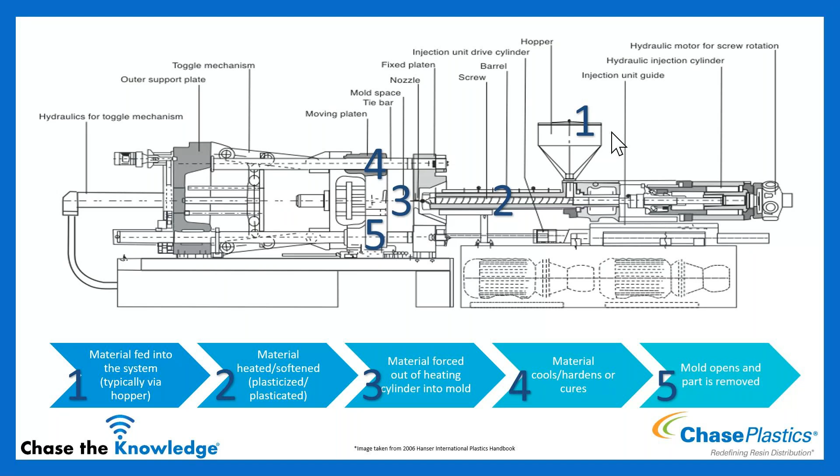So now that we've covered those basic pieces of the injection unit, let's talk a little bit about how we've got to the configuration of the injection molding machine that we're most familiar with today.

When injection molding started out, we were in single stage plunger units. This is a non-screw type machine where you have a barrel that's heated. Material is fed into this. The plunger then forces the material around a spreader, and that spreader is really where the heat comes into play. As that material is spread around the spreader there's heater bands along the exterior, and that allows the material to soften and become molten. And then the plunger continues to feed material across that spreader and into the tool.

These are the oldest configurations of molding machines as we know it. Some of the most early versions of this utilized things like a hand crank wheel to operate the plunger.

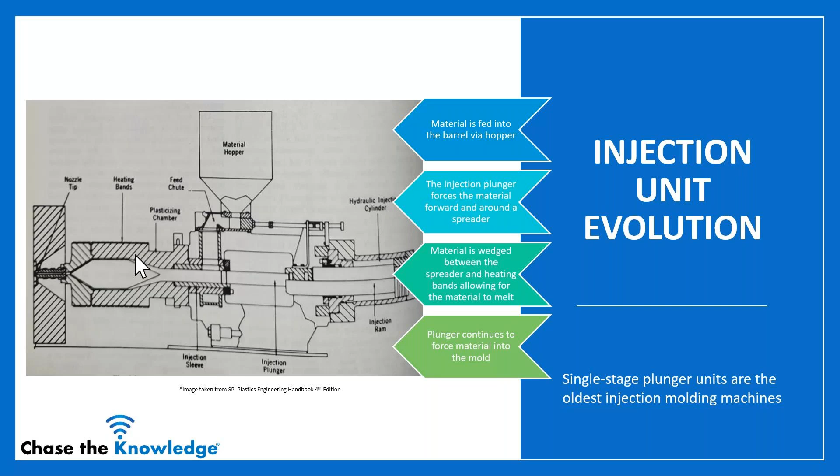From there, we started to separate the plunger and the dosing unit. So now you have two injection units, one responsible for melting and feeding the material into a secondary plunger, which controls the injection and dosing into the tool. So in this scenario, material is fed into the hopper at the top and into the first plunger and around that same spreader that we saw from the prior slide.

However, instead of going directly into the tool from here, the first plunger feeds a second cylinder. This injection cylinder, once it has a sufficient shot fed into it, can then inject forward and dose material into the tool.

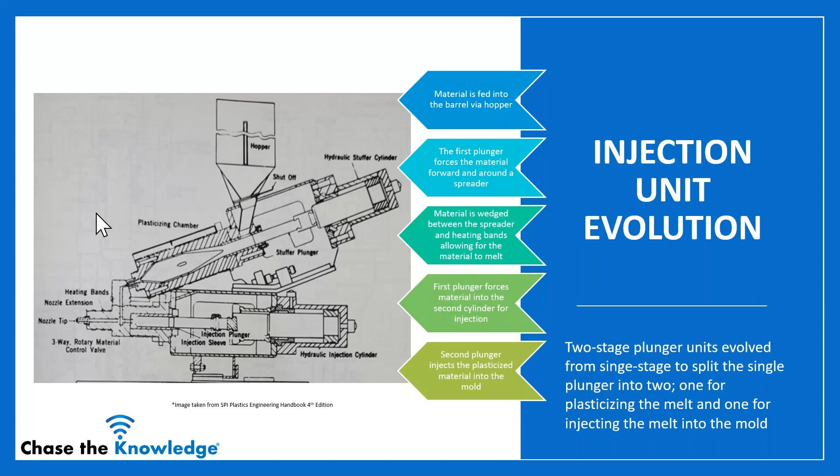Now, you may still find some variations of those machines out there today. Most notably, Sodick produces a screw-in plunger type machine that you can find something a little bit closer to that two-unit style here, although it's going to be a plunger and a screw.

That leads us to the most common setup for an injection molding unit that we have today, and this incorporates the reciprocating screw. So much like the other scenarios, you're going to feed material into a hopper and through the hopper into the barrel. However, now we have a reciprocating screw that as it rotates, material is fed down the length, lets us build a shot in front of the screw.

And then we use the screw also as a plunger by the use of a check ring or non-return assembly at the end. That allows us to not only plasticate with the single screw, but also to use that screw as an injection cylinder.

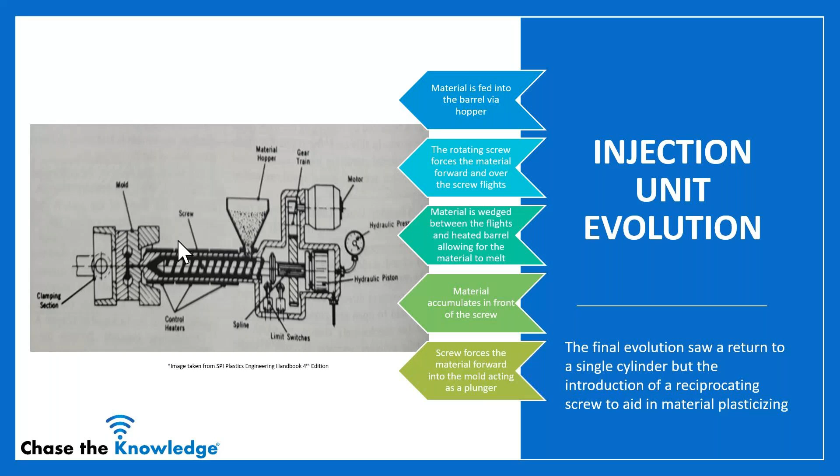What we call there is a pre-plasticizing style. The two-stage and the reciprocating screw pre-plasticize. In the single stage, you're plasticizing at the same time that you're forcing continuous material over it.

The reason we've switched to this style is there are several advantages. Melt homogeneity is a large one here—you get significantly better mixing, faster injection speeds because you're not forcing solid material through the spreader. You will have some higher injection pressures, but you get better injection control and better shot weight control with pre-plasticizing units.

As the industry through the 70s became tighter in profit margins because of what was happening with the petrochemicals industry, having better control of shot weight, shot size, and injection to reduce scrap became extremely important for us. So these are some of the ways the industry has adapted to drive us forward through those changes.

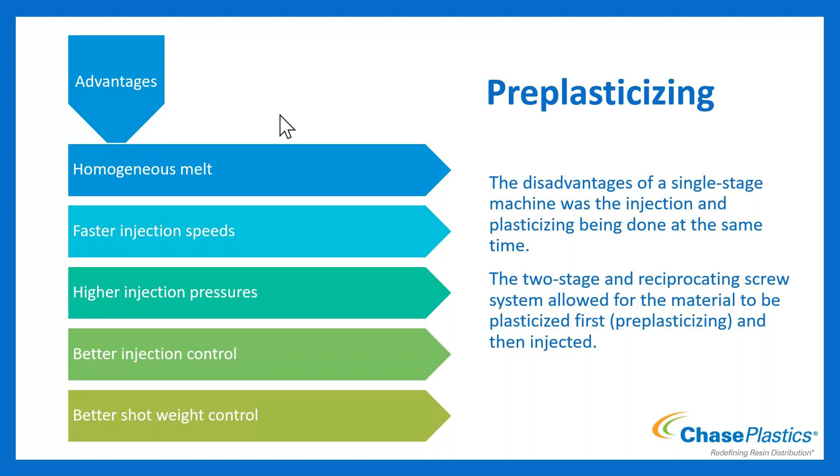Now that we've got a handle on the injection units, let's talk a little bit about the different molding techniques. Again, we're going to look to history to see where we started and then use that to understand where we've come and why we got here.

So firstly, when we were dealing with those initial plunger style machines, we had a lot of what we would call a traditional molding process. There's no splitting of the fill, pack, and hold—everything is done in an injection.

Now, in the 70s, the folks over at RJG realized there were advantages to splitting the injection and the packing and holding phase, so the decoupled terminology comes from that group. You will see here decoupled 1, decoupled 2, and decoupled 3. So really, this is decoupling the injection phase from the packing phase, and then all the way down to separating a fill, a pack, and a hold stage all into their own portions of the cycle.

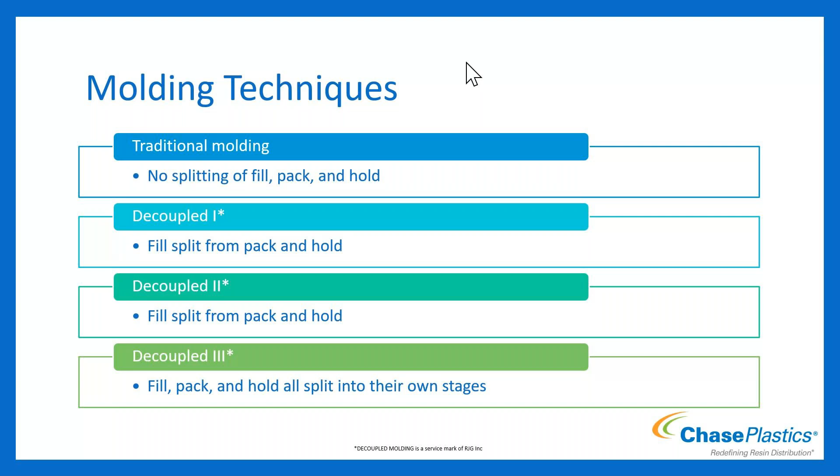So let's unpack these a little bit so we can better understand some of their pros and cons, and better understand why we have taken steps forward from what we would consider the traditional molding style.

So the traditional molding process, again, this is our earliest injection technique, unsophisticated machines, single stage plunger. All we're doing is continuously forcing and squeezing material through that heated spreader and holding it in there until the part's solidified, or forcing it in there until the part's solidified.

If you didn't fill out your cavity, your only recourse is to squeeze more material in harder. However, that also led to quite a bit of what we consider overfilling or overpacking. You may see things like flash or dieseling, and those were really your only two knobs. Push it harder, push it softer.

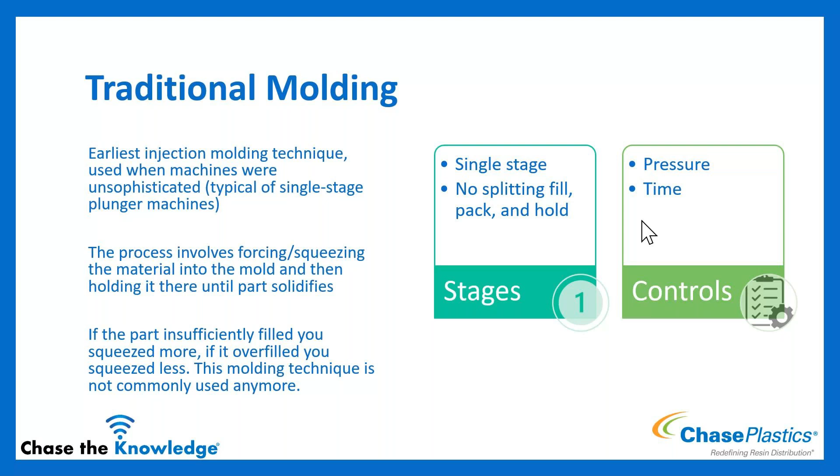It didn't give much control at all, and certainly could not handle a lot of the sophisticated geometry nearly as well as the scenarios and techniques that we use now. So this stage is a single stage, no splitting of the fill, pack, and hold, and pressure and time are your only controls. So then we move into the decoupled 1 scenario.

This is the earliest adaptation of it, and it requires a 2-stage reciprocating screw machine or newer to accomplish. In this process now, we are filling the mold with a controlled velocity until the part is volumetrically full, and then we transfer to the pack and hold.

In this scenario, the melt inertia from fill and the pressure generated is used to pack the mold. It's not a fully separated decoupled two process where the fill and pack are handled completely separately, but it's more the first acknowledgement that the packing of the mold was also a critical portion of the cycle.

So this is a two-stage process, and fill is decoupled from a single pack hold combined step. And now you have velocity, pressure, and time as your control variables.

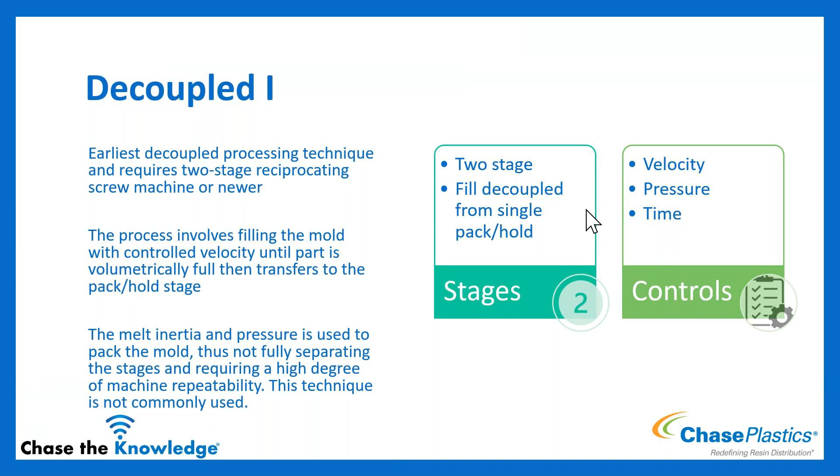From there, we moved into decoupled two. So this is the next evolution. Again, this needs a two-stage reciprocating screw machine or newer. And now we're filling the mold under a high velocity to take advantage of shear thinning in material rheology, polymer rheology.

However, unlike decoupled one, we are now underfilling the cavity on purpose in the fill stage. We're only going to fill it to 95 to 98% full so that we don't have the inertia and the generated pressure of the material reaching full volume of the cavity, but instead we're going to fill it to that 95 to 98%.

And then we're going to initiate a pack under pressure control. So this technique then allows us to fill much more rapidly because we don't have to worry about the inertial overshoot of filling the cavity, because we're purposely going to leave the cavity with a small amount of volume in it so that we can account for that under the pack phase. So that fully lets us take advantage then of polymer rheology in shear thinning to increase repeatability.

And then we can pack separately. So again, this is a two-stage process, and now fill is completely decoupled from pack and hold. And again, velocity, pressure, and time are our control variables here.

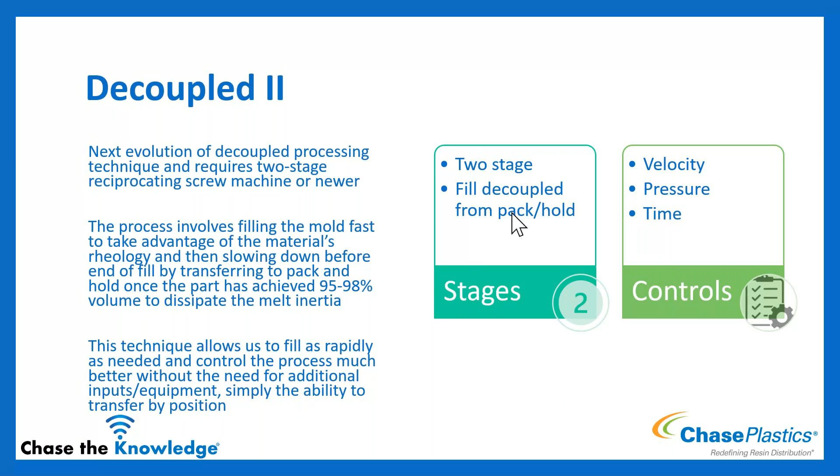From there, we moved into decoupled three, which is what we consider the newest evolution of decoupled molding, and does require some extra equipment and typically newer molding machines to accomplish.

So much like decoupled two, we're going to fill the cavity under high velocity to take advantage of that material rheology and shear thinning. We're then going to pack at a low and controlled velocity to meet a set pressure. Once that pressure is generated, we can drop the velocity component so we're no longer moving the screw, but we're statically holding at a pressure now.

What this does is gives us significant control over the pressure in the cavity of the tool. Now you may ask, when would that be extremely critical?

High volume multi-cavitation tools can benefit greatly from a decoupled three process, but so can insert molds, especially if the inserts are delicate and have a maximum pressure that they can tolerate during the molding process without being damaged. So you may see magnets inserted using a decoupled three process to protect the magnet.

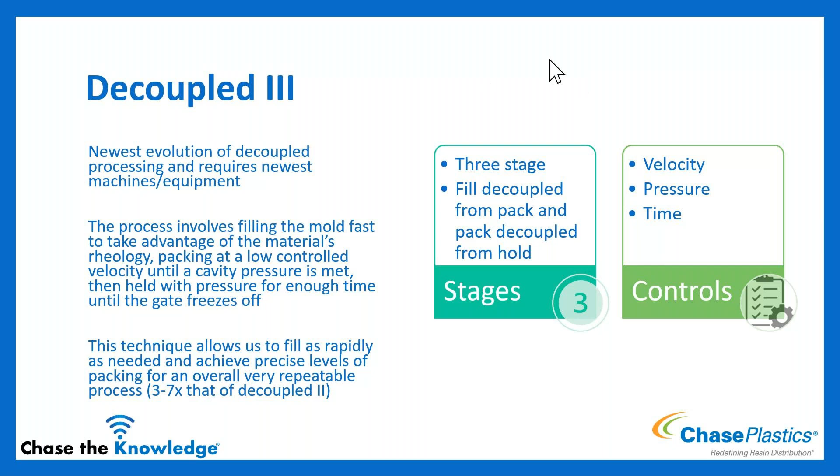Okay, let's talk a little bit about the cycle. Here you have a typical injection molding cycle represented in a pie chart. We're looking at cycle start, mold close, filling the tool, pack, hold, cooling and recovery, mold open, and ejection.

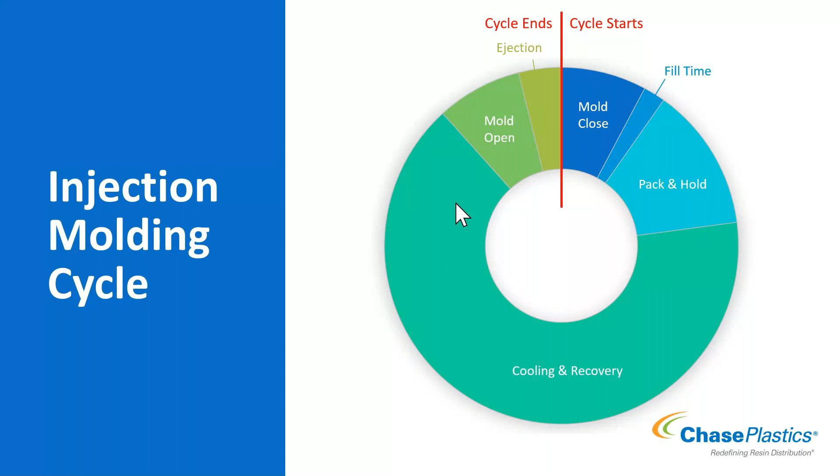During the fill stage, as I mentioned earlier, this should be controlled by velocity, which means we need to give our machine enough pressure to achieve the set velocity. And we need to give it a little bit extra to account for material variation from lot to lot, so that we don't end up in what we call a pressure limited situation, where our velocity becomes limited by the pressure we've allowed the machine to use.

There are a couple of studies that need to be conducted during this time, and we'll talk more about them later, in order to optimize this process in the scientific molding methodology. In this portion of the cycle, we conduct what's called a short shot study and an in-mold rheology study.

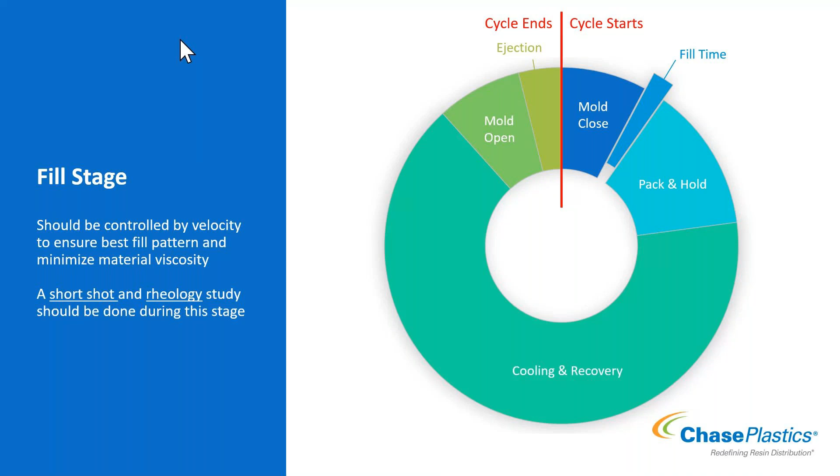So the short shot study, this lets us determine the appropriate volume to inject into the tool to hit that 95 to 98%, so that we can transfer to pack.

In order to do this, we're going to make sure that pack and hold is zeroed out or turned off. No pack and hold pressure, no pack and hold time. We're going to adjust our transfer position upwards so that we do in fact achieve a short shot.

We're going to mold that short shot, weigh it, and label it part only. Then we're going to decrease the transfer position and reiterate that same process: shoot, label, weigh, at varying percentages of fill. I like to do this at 10, 20, 30, 40, 50, 60, 70, 80, 90, 95 or 98, and 100%, so that you have a significant fill progression.

This lets you visualize how the tool is filling. It lets you validate your filling simulation. Am I seeing the same fill pattern in my tool as I am in my simulation? That gives me good confidence that some of the other outputs from my simulation are likely correct, or at least directionally correct.

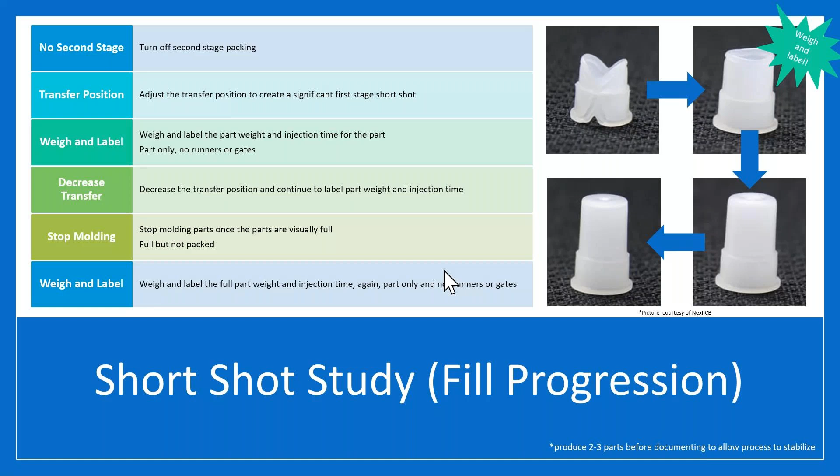So once we've made those 10 or 11 pieces, we can then get an idea of where our 95 to 98% fill is so that we can adjust our shot size accordingly. Not only are we going to learn how the tool fills and where gas might get entrapped and where we might need to vent, we're also going to validate our simulation and determine our first stage fill volume, all with this study.

From there, we're going to perform a rheology curve, also called in-mold rheology or an in-mold viscosity curve. What we're essentially doing is getting a relative viscosity and relative shear rate so that we can capture the shear thinning of the material in our specific machine and tool.

So how do we conduct this? We're going to turn off that second stage again. We're going to ensure that at our highest velocity, we still have a short shot so that we don't accidentally inertially overfill the cavity and flash it. So you're going to start with a high velocity and a higher transfer position so that you're not accidentally flashing the tool. We might want to bring that transfer down a little bit from our 95, 98, maybe 85, 90%, somewhere in that ballpark, and then adjust our velocity down.

We're going to make sure that we're documenting the speed, the time, and the transfer pressure at each iteration. We're going to conduct a series of 2 to 3 injections at each velocity set point and document the speed, time, and pressure. From there, we can calculate an apparent shear rate, which is going to be 1 over the fill time. And then we can calculate an apparent viscosity, which is going to be the injection pressure times the fill time.

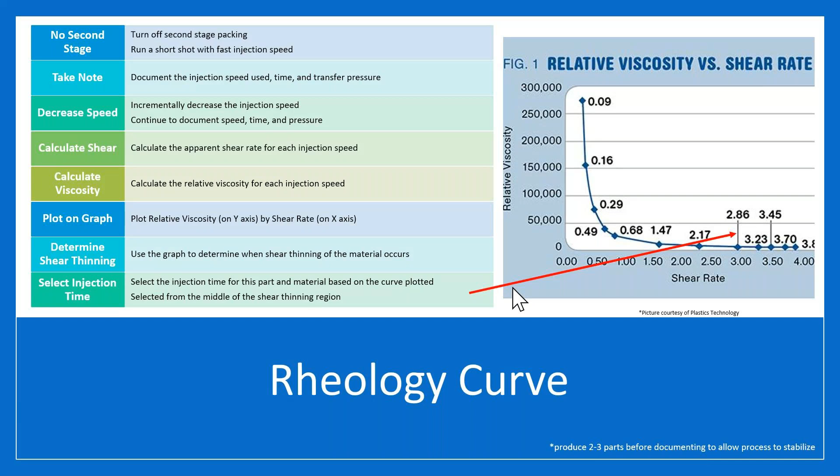So I've been mentioning taking advantage of the shear thinning behavior. So what is this? When plastics are exposed to shear, we get an untangling. At solid, you have just an entangled mass of polymer chains. As we heat them, those chains start to increase their intermolecular spacing - think of the chains getting a little further apart. Once they're hot enough to be far enough apart that we can slip them past one another, we have flow. As we flow them at higher rates, we get orientation and alignment. That orientation and alignment is what drives our viscosity down. That's what makes a polymer a shear thinning material.

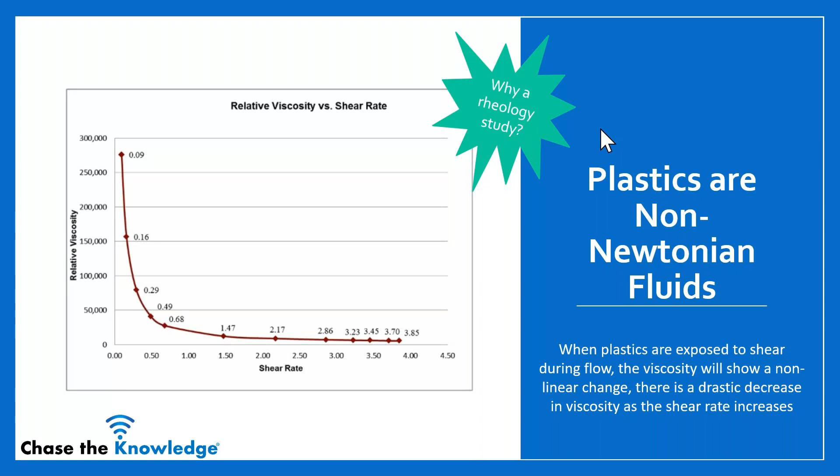So what we're really interested in is the polymer's response across the shear regime we're going to be working it in. For today's conversation and this webinar, we're going to be talking about this middling shear regime where we do our molding. We can see that the response of these polymers is not linear in this shear regime, and that's why we do the in-mold rheology study. This is really what we're trying to understand when we're doing that shear sweep and trying to figure out where we should best process these materials.

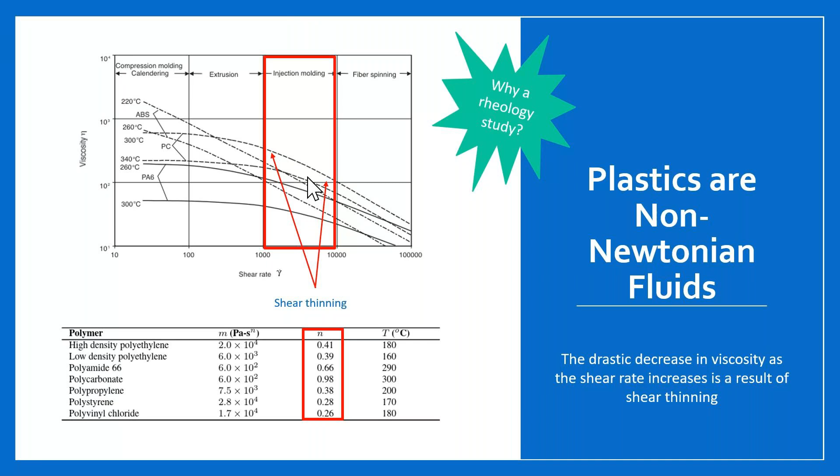Okay, so once we've filled the tool to our 95 to 98 percent, we transfer from velocity control to pressure control. Many people call this transfer; others know this as the VP switchover position. That VP literally means velocity to pressure switch position. So we're switching our control methodology between fill and pack and hold.

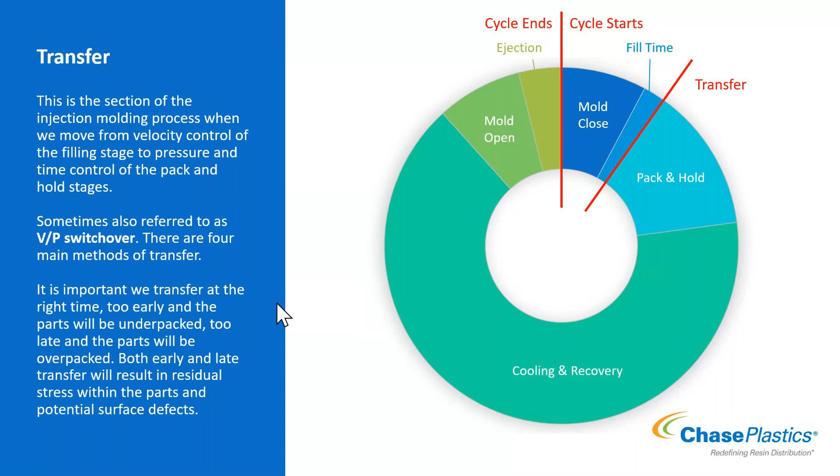It's extremely critical that we transfer at the correct position. If we transfer too early, we will likely underpack parts. If our packing velocity is lower than our fill velocity, we may see things like record grooving or hesitation banding appear on our parts, or we might short shot. We might also drive a high amount of stress as we're getting a frozen layer building while trying to drive that polymer at a slower speed through a constantly decaying flow bore. On the other hand, if we transfer too late, we can flash the cavity, or we can diesel, or we can mold in a very high amount of molded-in stress and residual stress, which will result in the part likely failing prematurely under load in application. So getting this position correct is extremely critical to the performance, repeatability, and quality of the molded product.

There's a couple methods we can use to do this, and we've got them listed - these are your standard, most common 4 methods to transfer. Most of your machines will at least give you the top 3 as a standard drop-down menu to select from. We have them here in order of accuracy, where transferring by time is not as good as transferring by pressure, which is not as good as transferring by position, which is not as good as transferring by cavity pressure in terms of shot-to-shot repeatability.

So let's talk about each of these just a little bit. If we transfer by time, our screw is going to inject forward for a set duration. It's very easy to set this up.

However, we don't then have any feedback on how much volume went into the cavity. There's no direct tie to amount of plastic going into the cavity and the transfer position here. It's strictly inject for this amount of time.

Now, if there's some changes, because injection molding is not a steady state process, it's a pseudo steady state, we're going to see some heating and cooling transiently as we're going through our run that can lead to some slight changes in viscosity. Same thing, batch to batch, lot to lot of resins, setup to setup, we might see some small changes. Transferring by time does not account for this. It will let you maintain the cycle time, but it will not as accurately let you maintain a volume of plastic going into the cavity.

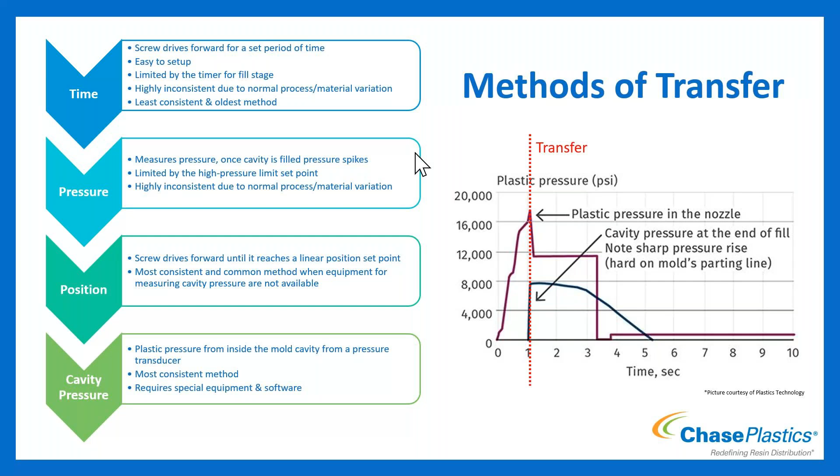So now that we've talked about triggering pack and hold, let's get into that just a little bit. So pack, this is the second stage of the molding process when the part finishes filling that remaining 2 to 5%. We still need to put volume into the cavity during the pack phase, not only to account for the change in density through solidification, but also note that we are injecting to 95 to 98% under fill, so we have to take up that other 2 to 5% under pack, and then a little bit more to account for that densification during solidification.

Now, because we're still putting volume into the cavity in pack, we still have a velocity component to that piece of the puzzle. Pressure is the control variable, but the screw is still moving forward. Many new molding machines will give you control of that velocity for your pack. What differentiates pack from hold is hold drops its velocity component.

Now, once we've generated a set pressure in packing, because we're still driving that screw forward to generate that pressure, as soon as we hit the set pressure there, or desired pressure, we can stop the velocity component and hold the screw static at a given pressure. This lets us keep everything in the tool. If we were to release pressure at that point in time without having a gate sealed off, you can get backflow out of the cavity, which will then introduce some quality issues.

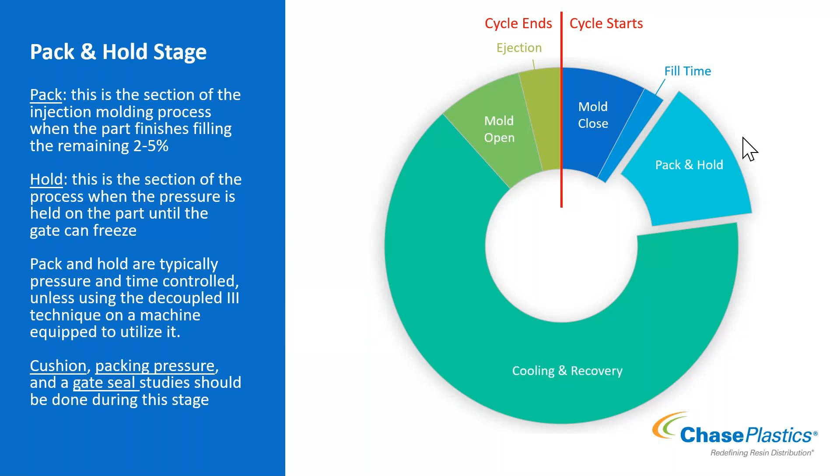So it's so important to have a cushion. I just want to talk about it quickly. It's not a study that we necessarily need to do. We like to dial in the cushion so that we get somewhere between 1/8 and 1/4 inch of material left in front of our screw to pack off of, or to use for packing at the end of our cycle. So we should end packing and holding with about that much molten material left in front of the screw, 1/4 to 1/8 of an inch.

The cushion is absolutely necessary because of fluid dynamics. In order to pressurize the molten material in the cavity, we have to act on that through a connective molten pathway. So if there's molten polymer in front of our screw, we can push on that and transfer that pressure all the way into the cavity. If our screw bottoms out and cannot push on molten polymer on the cushion, we lose our ability to pack because we cannot pressurize the cavity.

So we have to have cushion. It's what's left over once we're done packing and holding in front of the screw. But if you don't have it, you've lost control unless you're doing a foaming process. We're not going to talk about that today, but that's one of the few exceptions.

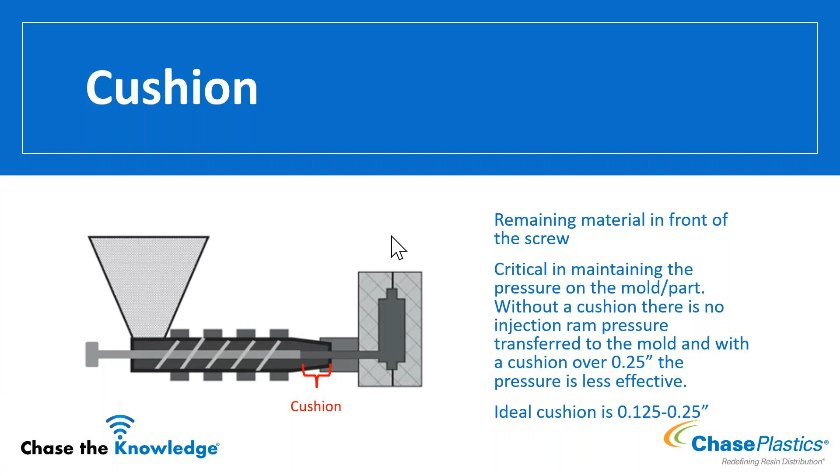So from there, we need to figure out how much pressure to pack with, and then how long to pack for so that we can seal off. How hard we pack, how much pressure we use, is directly related to sinks, voids, and flash. So we want to establish our 95 to 98% full. We're going to set our packing time high, typically around 10 to 15 seconds.

That should give us some approximation of a gate freeze. We're going to start with a low pressure, and mold a part with a low packing pressure for 10 to 15 seconds. That should produce us a short shot.

And then we're going to incrementally increase that pressure until we have an acceptable part with no shorts, no sinks, no voids, or at least an acceptable amount of sink or void. That will be our minimum pressure. We're going to document that. That is the bottom of the window.

We're going to continue to incrementally increase that pressure until we no longer make acceptable parts, either dimensionally out of tolerance on weight, or we start flashing the cavity, which is just the first onset of parting line flash is what we call angel hair flash. It's very thin, very wispy. It's not a gross flashing of the cavity. It's just a small line that starts on the parting line.

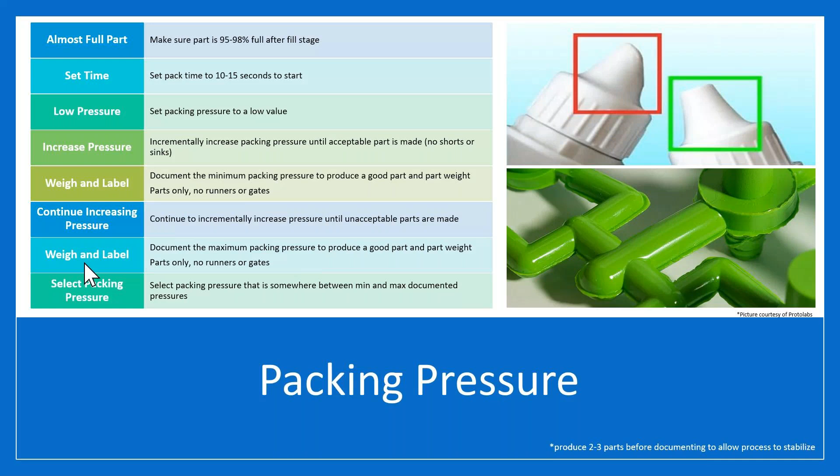So once we've established that pressure, we then need to establish a time. We need to hold the material in the cavity until the gate solidifies so that material cannot backflow out when we remove pressure from the screw.

We are going to use that ideal packing pressure that we found from the prior study. Now we're going to take that 10 to 15 second time that we had and zero that. And then we're going to start incrementally adding packing time each shot, and we might go 2 or 3 shots per time setting to let the machine and process stabilize.

And we're going to weigh the parts, not the runners and the gates. We're going to remove those and weigh the parts. We're going to plot that part weight as a function of packing time.

And what we should see is an increase in weight until an asymptotic point where we're no longer able to pack more material into the cavity. This is a very good indication that our gate has frozen, and at that time, we can no longer affect what's in the tool with the screw and through packing and holding pressure.

At that point in time, we might want to give a small buffer for material variation, and then we're going to use that as our packing time. So our freeze time plus a small buffer, and we're going to then set that as our packing time. That's going to ensure that every cycle we freeze the gate and that we have a consistent amount of material that stays in the cavity.

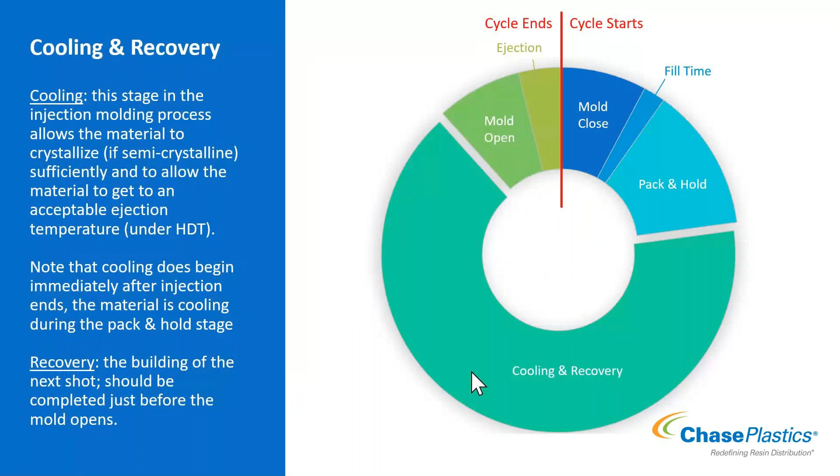Now, we can notice from this pie chart as well that cooling is the largest portion of the injection molding cycle. And this is because polymers typically have low thermal diffusivity, meaning the rate of heat transfer from the polymer to the mold is slow. And it slows down over time as we're solidifying and as an air gap starts to form as we shrink away from the cavity surface.

So there's a lot of variables that will affect that cooling time: thickness, melt temperature, mold temperature, injection rate, packing time, mold design. This is a PVT relationship, pressure, volume, temperature. And you will typically see this around 30 seconds or under. For thick wall parts, that might get up into the minutes, just depending on your specific geometry and scenario.